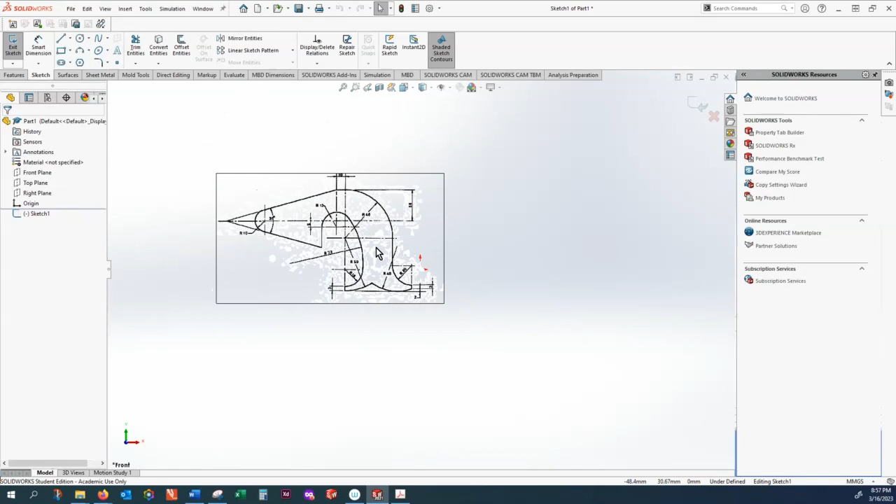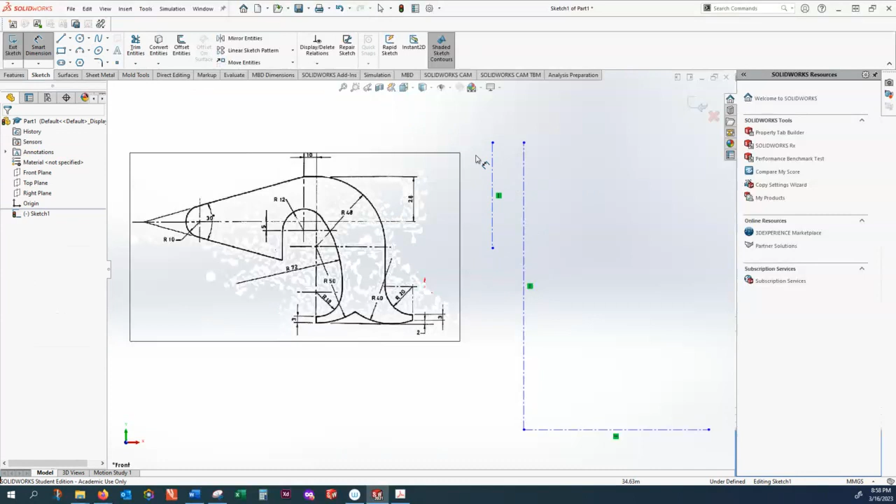So here I captured a screenshot from the dimensions, so let's start from this bottom line here. I start with a center line and then one vertical line from this edge. These are the reference lines, and then one line parallel to that one, which is offset 10 mil to the left, and let's make that size 10 mil.

So starting from the bottom, one small line here: let's put one point here, the second point is that center, the third point is this one. So we start with freehand positioning of the points and then add dimensions to those. From here to there, make this 3 mil, from here to here, make it 18, and from this point to here, make that 50.

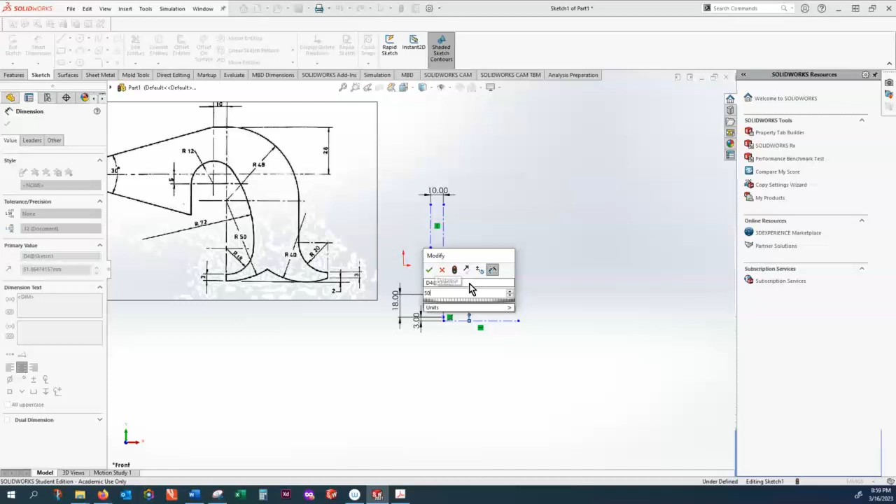Okay, at point 50, let's have a horizontal reference line. And then from here, I know the dimension to the top edge is 48. Adding a dimension from the top edge, say, here. Make it 48. And then coming down 28, another point here. So this point is here, that's 28, measured from the top.

And if I draw a reference line passing through here, then another reference line is 5 mil above that. Okay, now I think we can get started with adding a line between these 2 points.

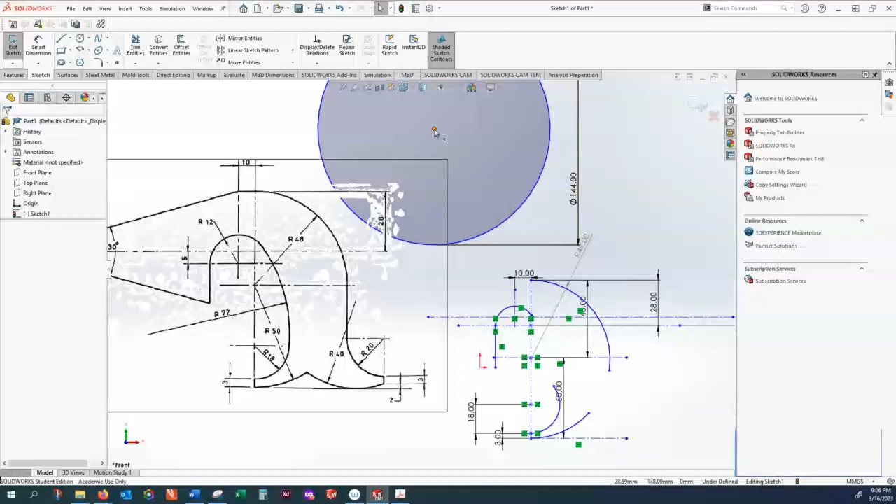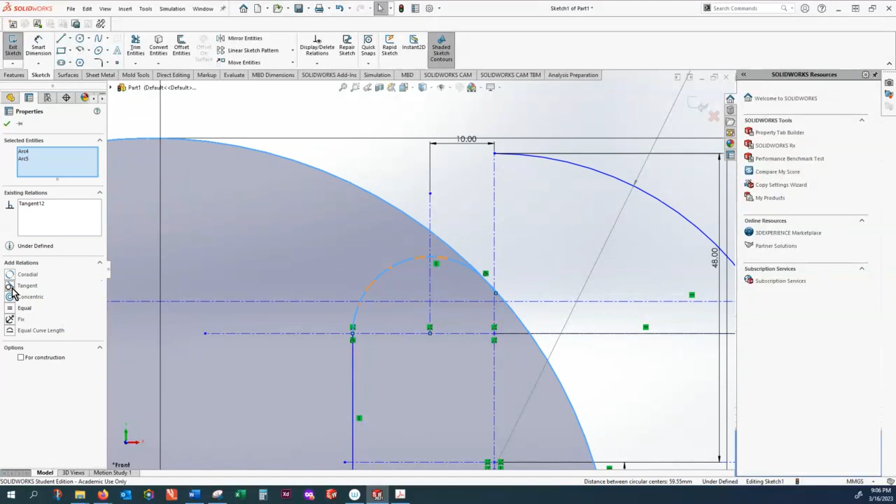Okay, so I bring that circle nearly there. And then we want this arc and that arc to be tangent, and also this arc and that arc to be tangent. So now that excess can be trimmed.

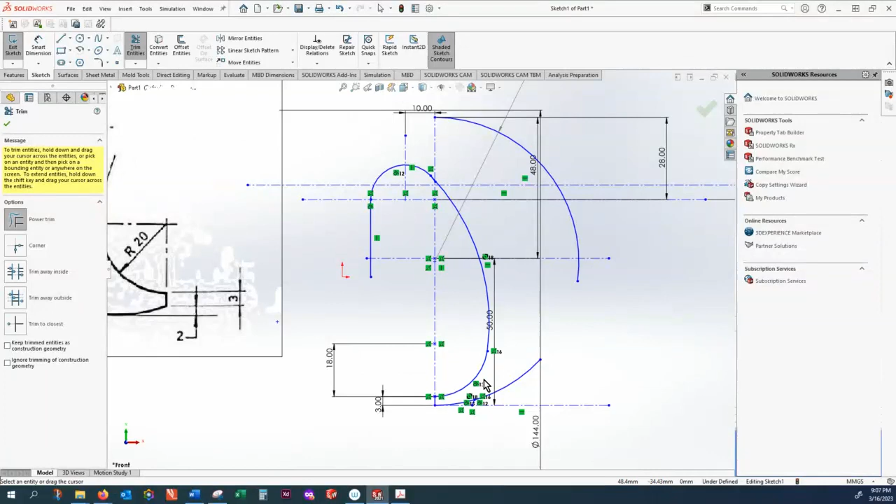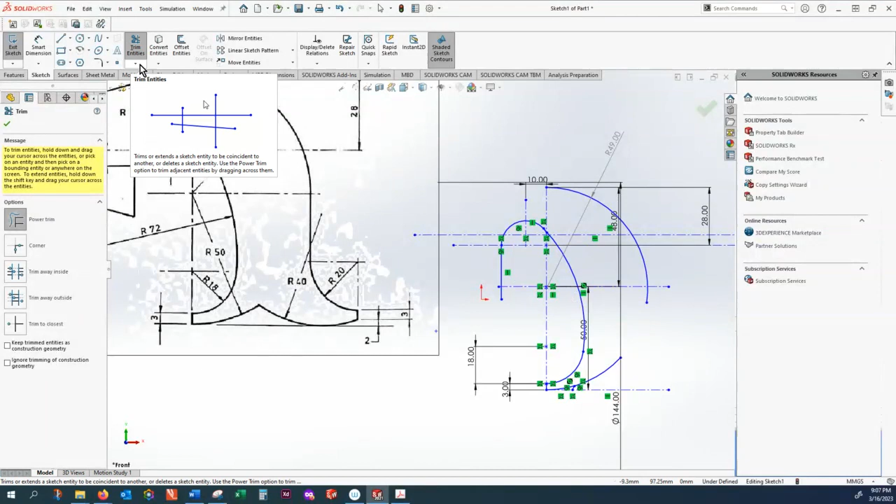This seems to be a straight line coming from that quadrant down. So from this quadrant, I draw a line vertically down, nearly to here, and then 20 mil to the right, and then vertically, this is 20 plus 3 plus 2, that's 25. So 25, this point is above this line.

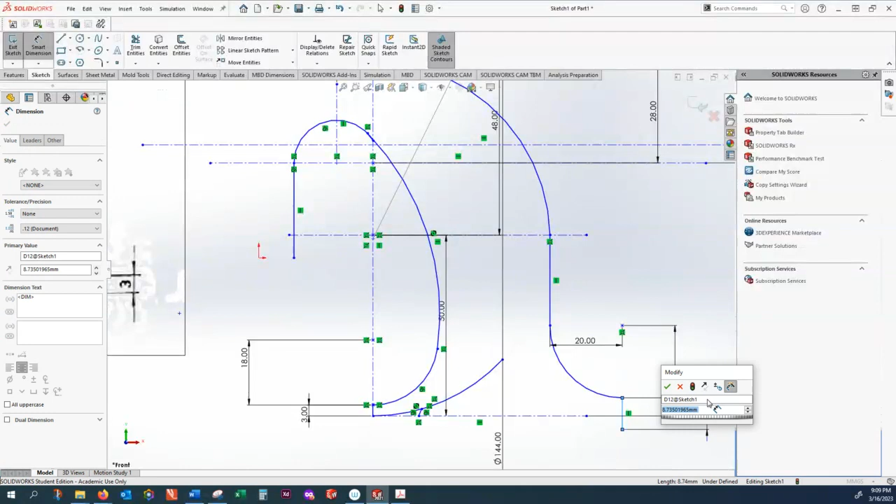Now the center of this arc is specified. And now let's start this up to here. Okay, so 3 mil we go down from that center. So just keeping the lower part of that, and that should be 3 mil. 3 mil arc.

Now let's have a look at this arc, 40. So 40, I can make a construction line somewhere here, which is 40 mil above that bottom reference line. That is 40. Okay, let's construct an arc which is sitting somewhere on this line and passing through this lower edge. And the radius is 40.

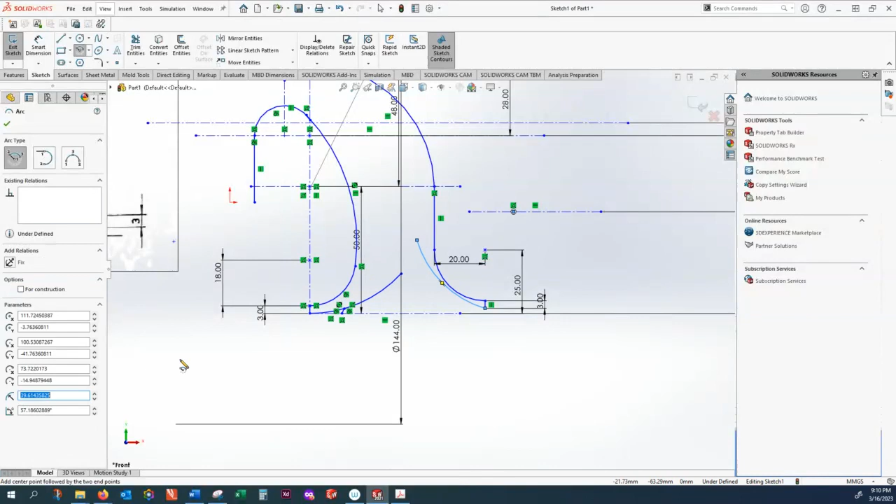Well, that's not quite what you expect, so let's do that again. So now, how do I know? So let's make a circle. Radius of 40. So the center should be somewhere if I extend that line to here. Okay. Now I know that this arc is tangent to here and passing through that edge over there.

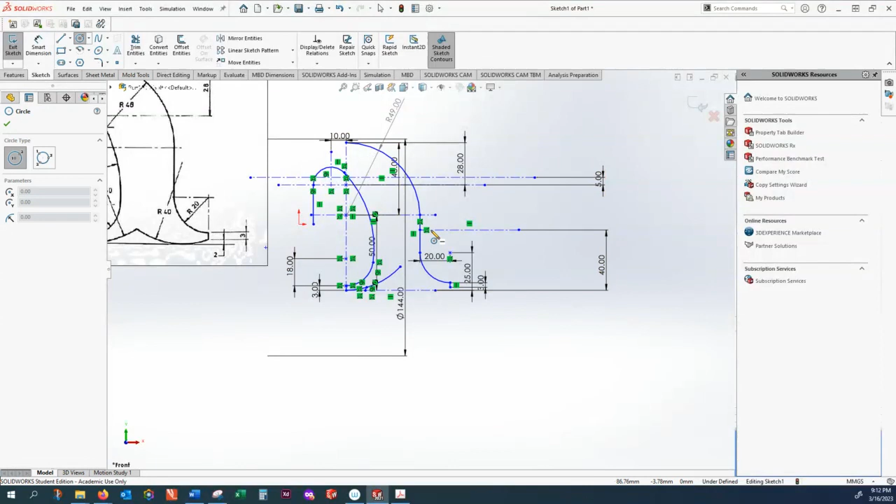So how can this be done? Let's make a circle. Say from here, and the radius is 40, and adding a smart dimension. Yeah, it doesn't need a smart dimension because that's tangent to here, but we want the periphery of this one and this point here, both of them selected, to be coincident. Okay, now that looks like it.

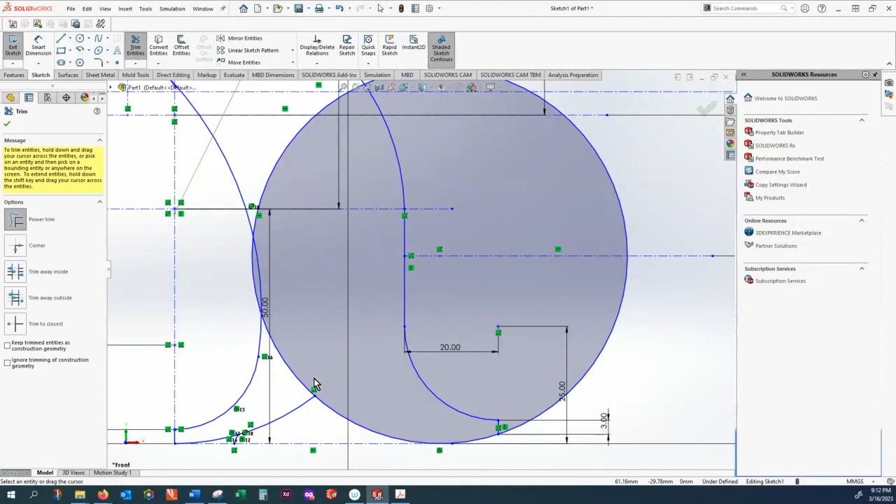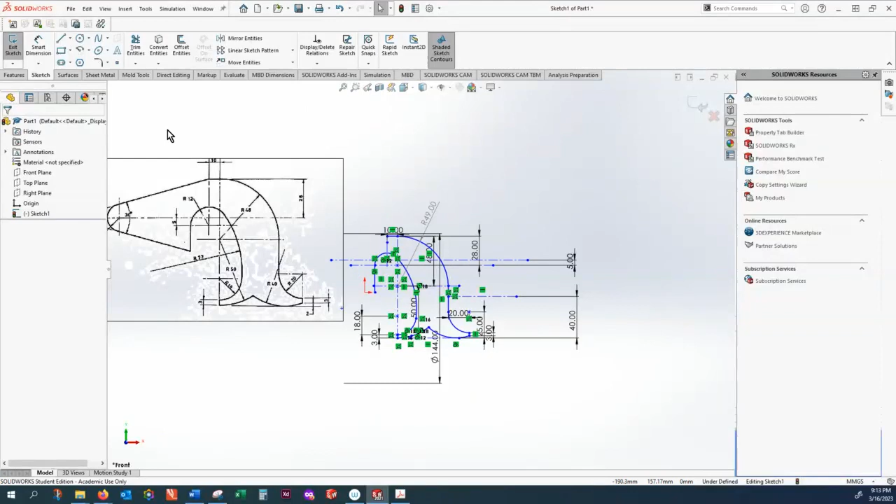And then all we have to do is just get rid of the extras, and that portion is orphan. Just get rid of it. Okay, so almost done. I have to go 10 from here to there, and then that line is here. I make a freehand line passing through here to there, and then making the angle between these two 15 degrees.

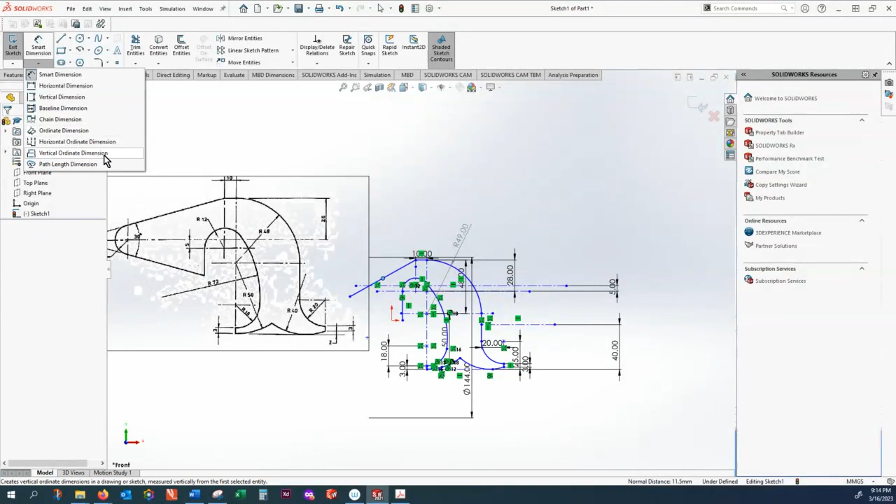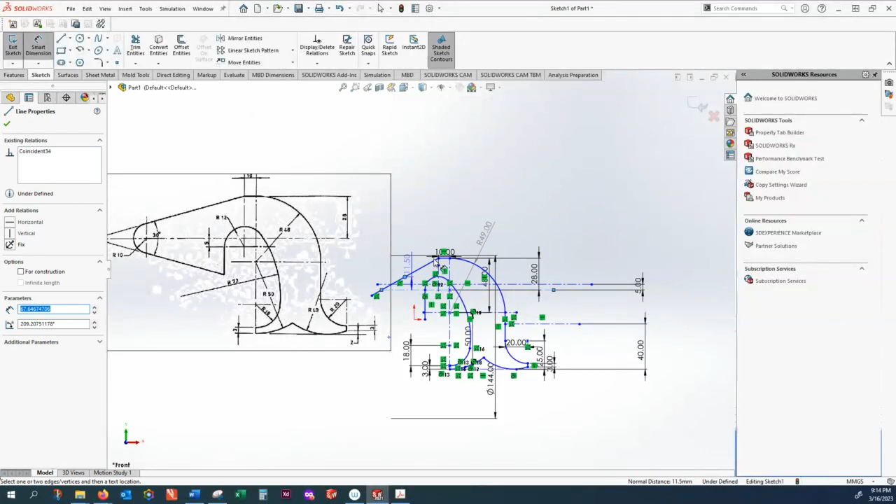So the angle between this line and that line, smart dimension, this line and this one has to be 15 degrees. Go to smart dimension, choosing the... okay. So how can I specify? Let's extend this line. Extending this line is here. So extend it up to here, and then adding an angle between this line and this line. For some reason, I'm not getting the angle. Okay. Okay.

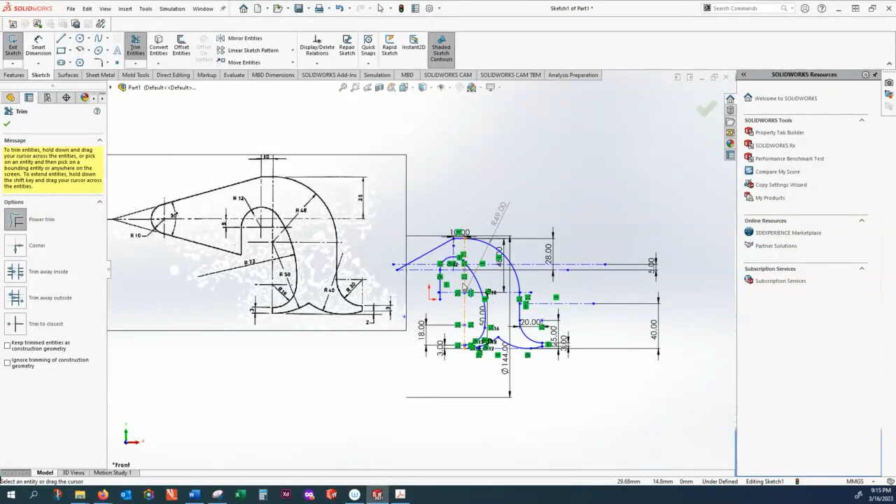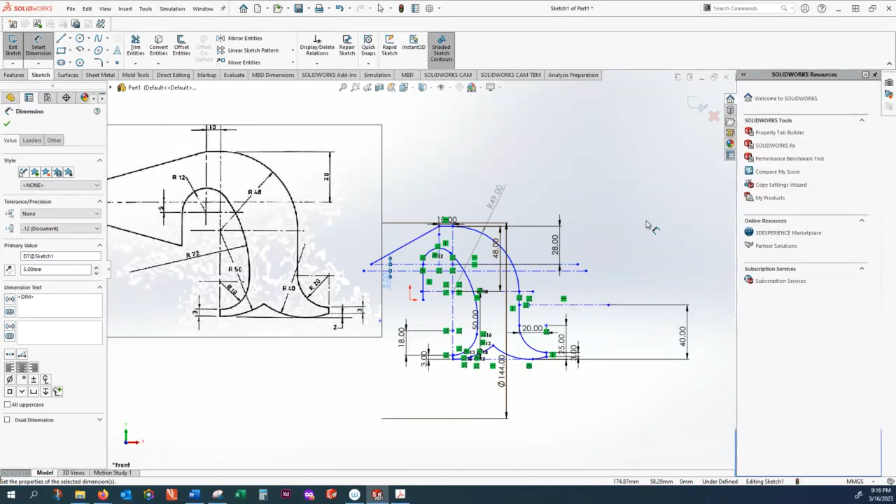I think that 5 mil should go below this. The 5 mil is not above that reference, it's below the reference. So make it 5 mil. And now the center of that arc, center of that arc 12, it has to be further down.

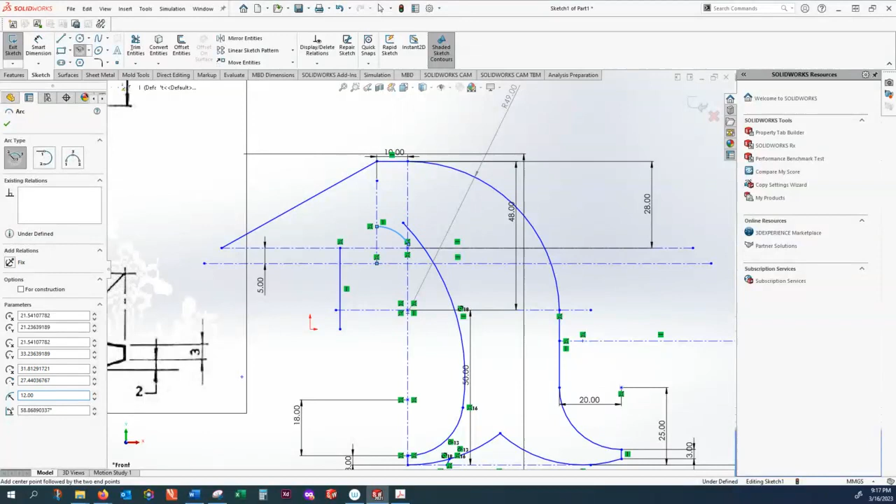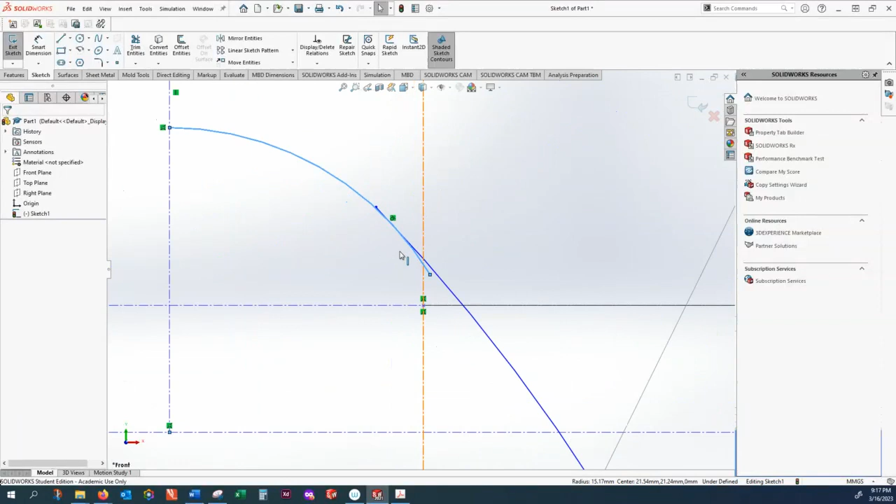Let's repeat that arc. I just extend that line over here, and from this point we make an arc with a radius of 12. Radius of 12, and then this has to be tangent to that line. To this line here. Okay, all we have to do now is just remove the...

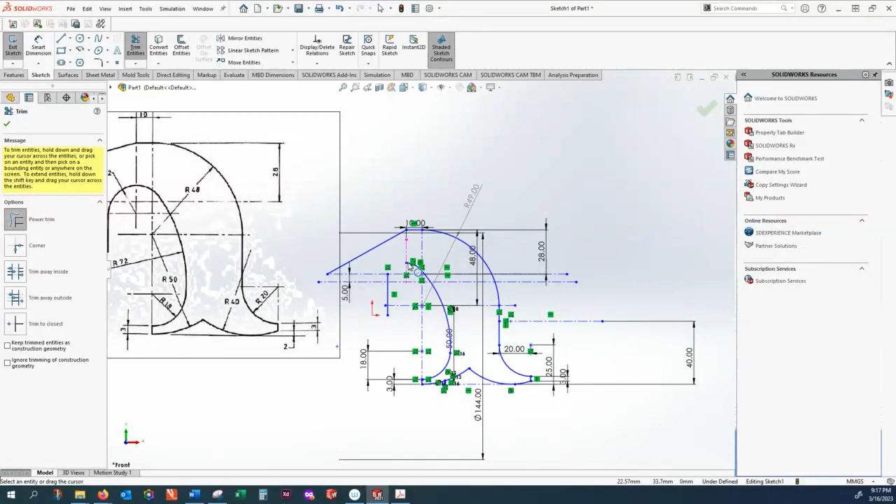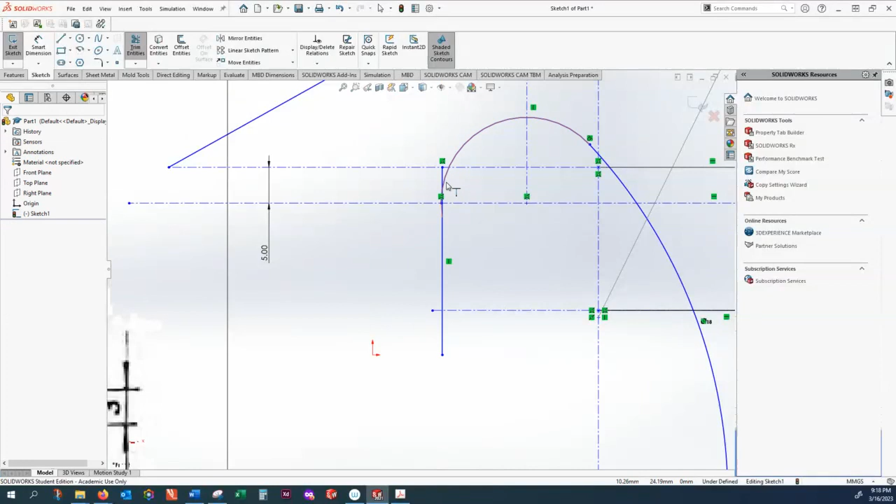See if we can extend that arc. Yes, we can. And also extending it further here and up to here. Now this line has to be done again from the end of this arc, go vertically down. Okay, let's see if we can define an angle between, smart dimension between...

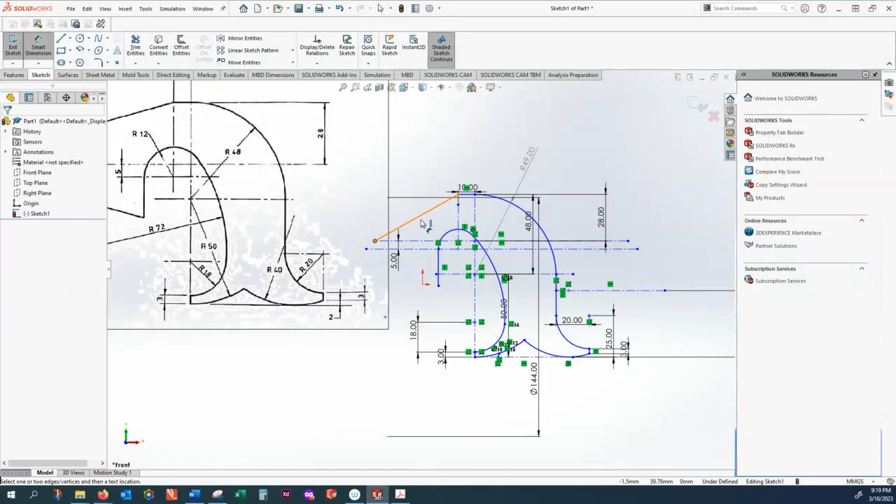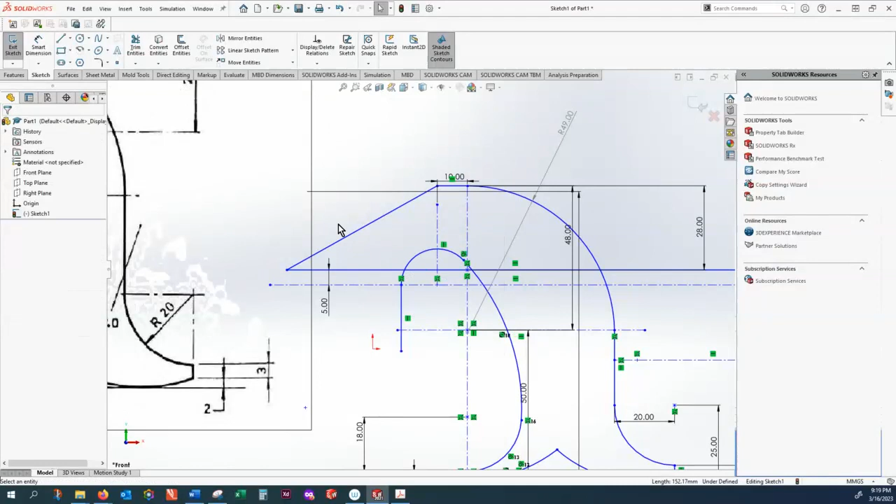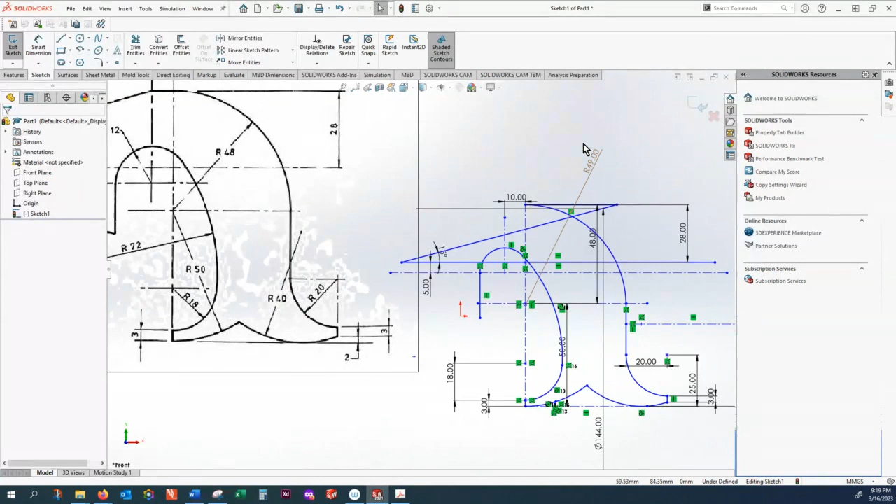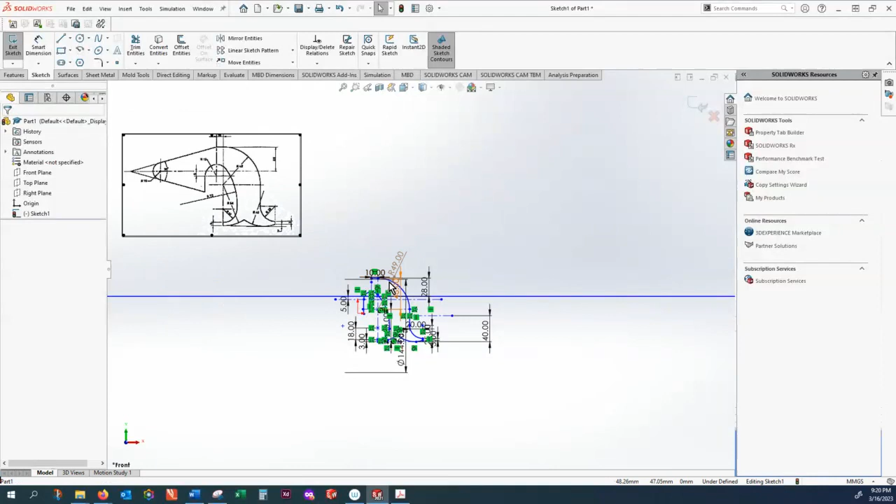Yes, something not quite right with this line. That's it. All right. So that has to be 15 degrees. And so I make that line a bit longer. And now from here, we make an arbitrary line. Now with this line, that and this one, the angle should be 15 degrees.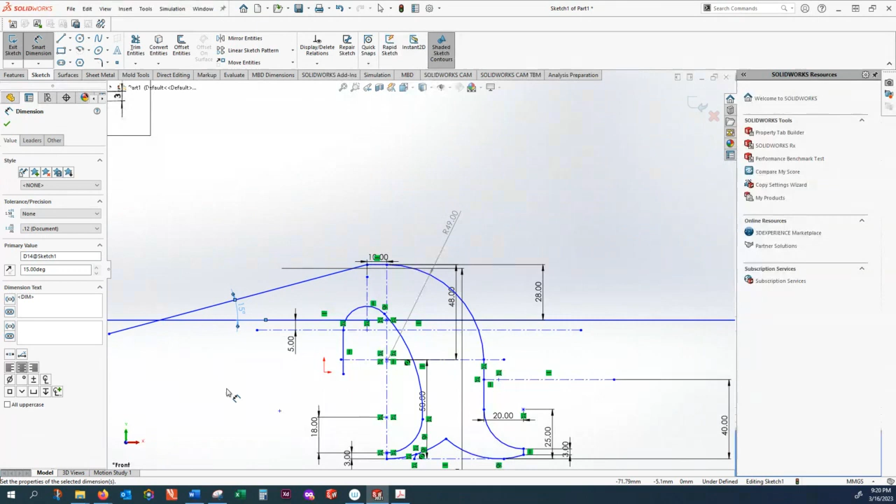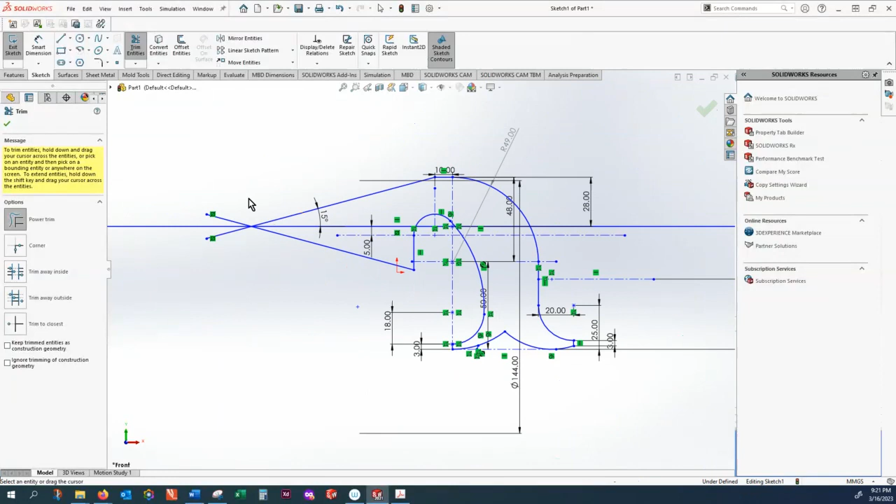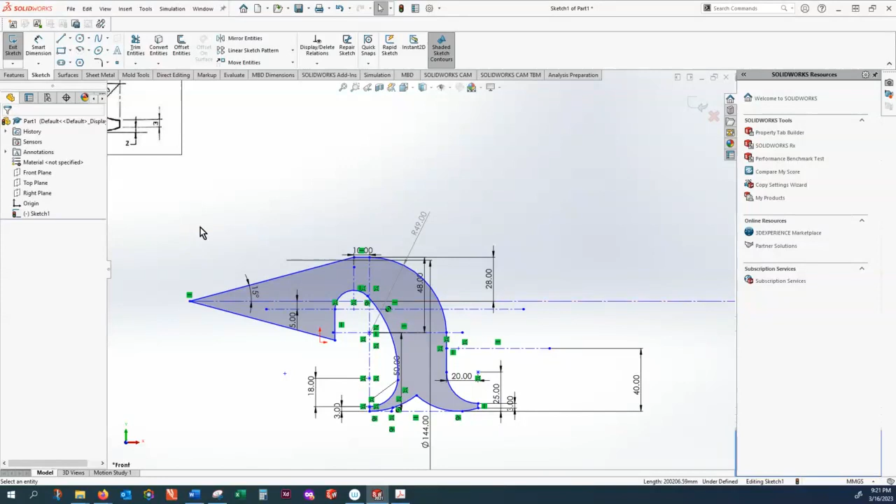Okay, and now I mirror that line down, go to mirror, and I want to mirror this one about that line here. Okay, all right, so here the intersection with that one should be modified. And these ends are modified. Maybe I don't need that line anymore. Okay, what I do is just change that to a construction or symmetry line. And then that apex should be rounded with a radius of 10. Radius of 10, apex rounded.

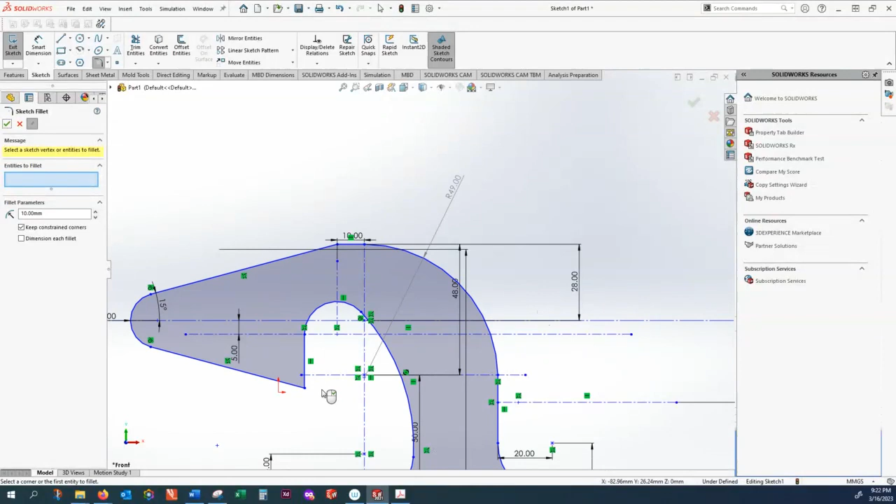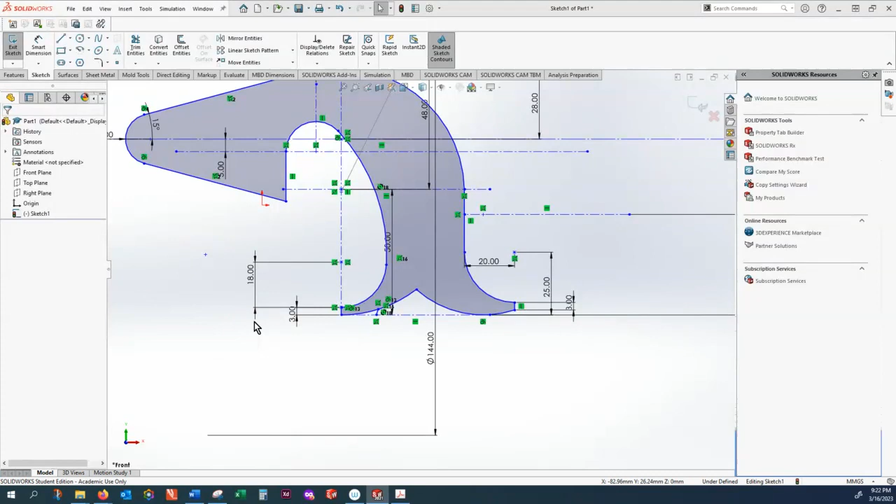And here you are. I think that shape is finished, and it's ready for extrusion. All right, how do you check the sketch? There is a sketch tool called repair sketch. And if I test this one, it seems there is no gap. And now I can simply go to the feature and have this one extruded for 5 mil. Here you have it.

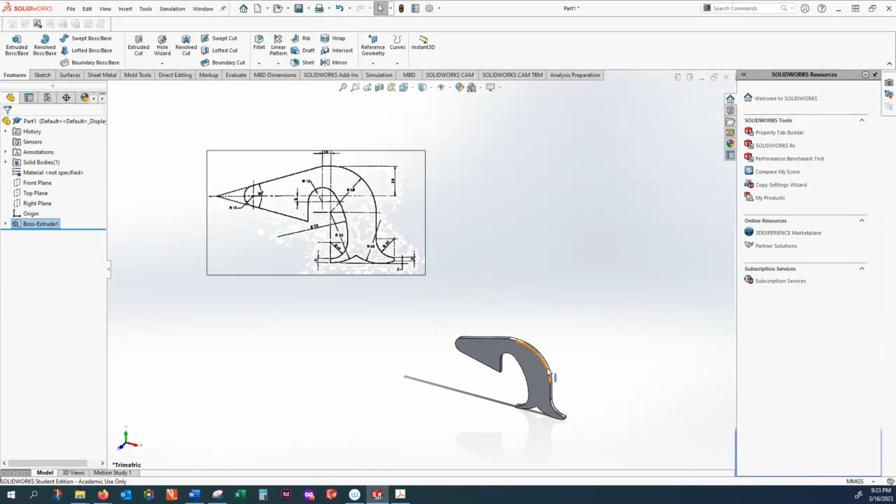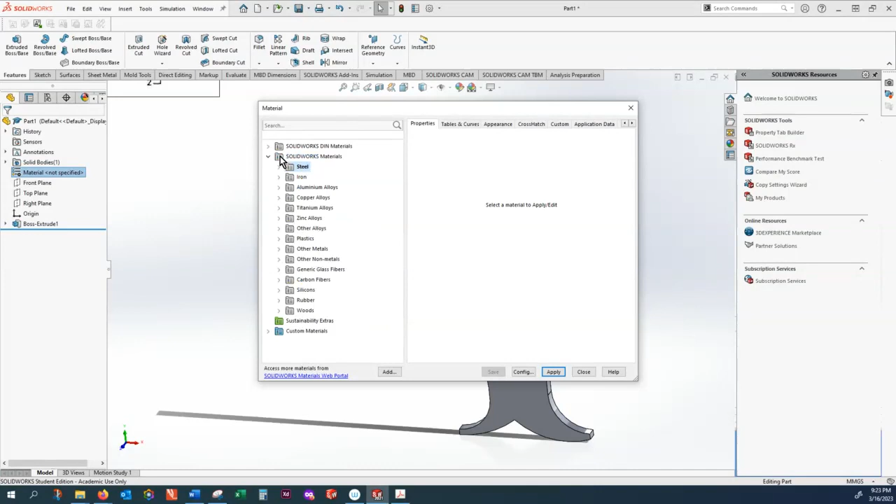That is the part which is called keyhole saw handle, and we just have to introduce an aluminum alloy, 6000 series, 6061 alloy. Apply those. Now you can easily find out the mass of this shape. This is only 79 grams. And if you want to make a drawing out of that, simply go to file, make drawing. You have to save this first. I'm just saving that on my network if I can.

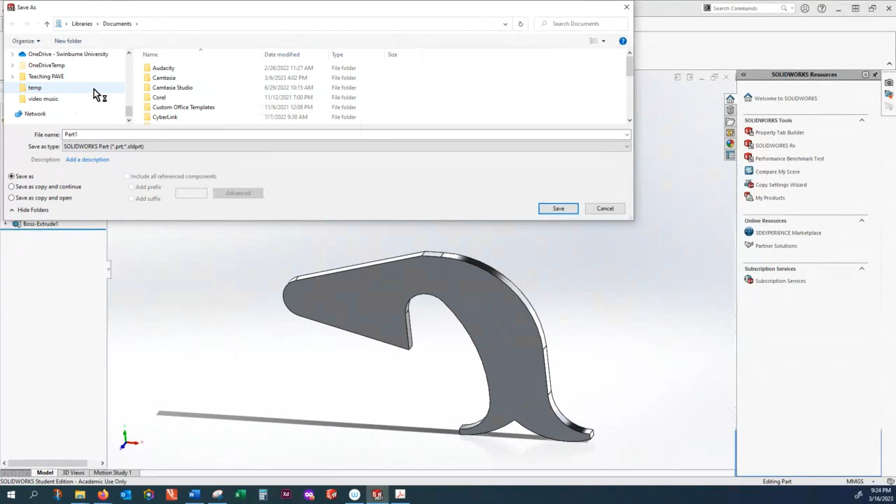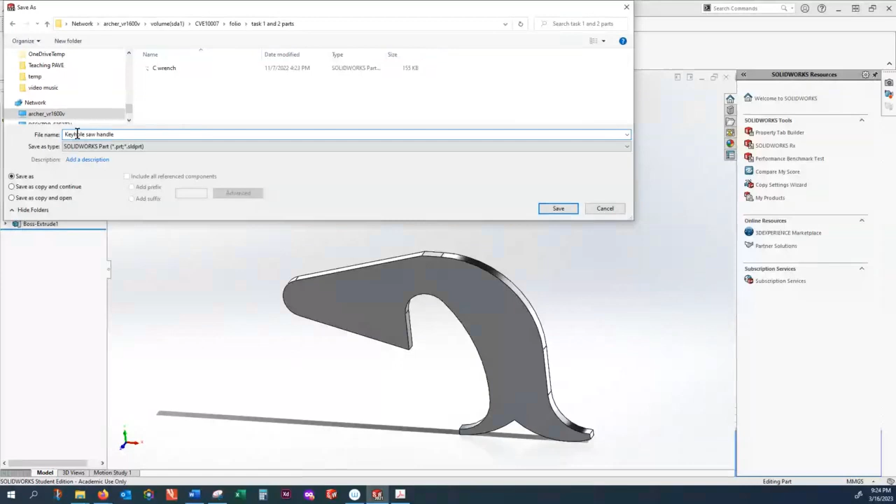All right, so the network drive that I'm saving this one to, that is here. And I've got my folio out there. Task 1 and 2. This is called keyhole saw handle. Save. Now this is being saved. You can make a drawing out of that.

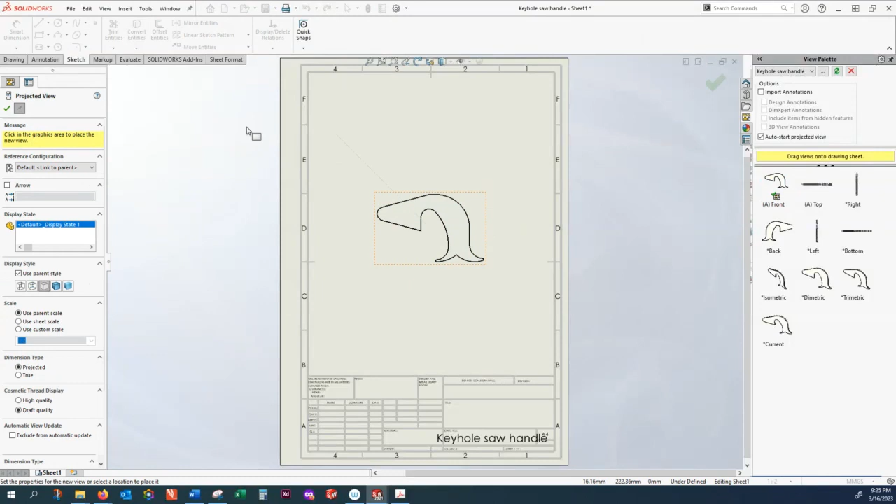Title block, A4 size paper, and drop the front view right here. And the rest is simply going to annotation, adding a few center marks, and the next step is adding dimensions. So I hope this video helped you in completing the part.